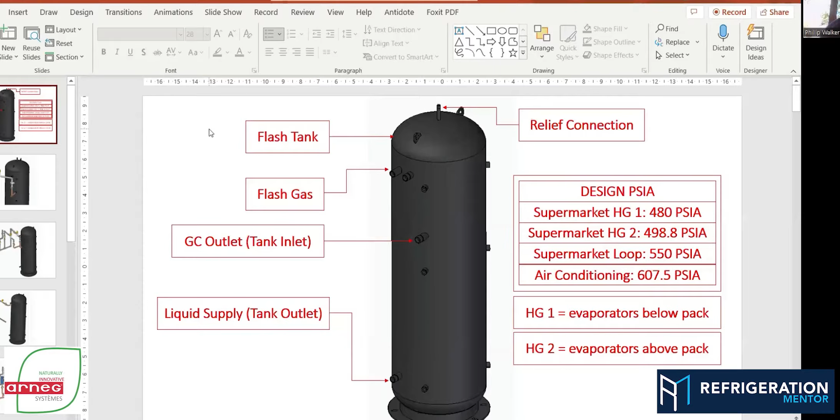And those who are listening on the podcast, we'll do our best to explain the visual cues. Okay, can you see this? Yep. Perfect. So I'll try and explain much better than last time. I know some of you folks reached out and said, hey, can you explain some of the photos, because I'm listening remotely.

So we're looking at a flash tank, and the flash tanks come in various shapes and sizes. What really determines the flash tank capacity is how much flash gas you have, or liquid being used for the cooling medium, more or less in the system, moving throughout your entire refrigeration system. So this specific one we're going to use for our hot gas discussion today.

So at the very top, we have 2 inlet connections. That's for our flash gas. And then in the middle, we got this inlet connection. That's our liquid coming back from the gas cooler. And at the very bottom, we have 1 liquid supply outlet that feeds our liquid header. And on the very top of the tank, obviously, we have our relief connection, which is typically between 650 to 750 pounds, depending on what type of application we're working on.

And all on the side, we have various design PSIAs. This just gives an outline on where Arneg systems is in terms of flash tank pressure in different types of supermarket and air conditioning applications. What we're going to look at today is basically supermarket HG1, meaning hot gas 1, 480 psi, and supermarket hot gas 2, 498 psi. And I know some of you folks reached out and said, what is the big difference between the two? It's really the location of the mechanical room.

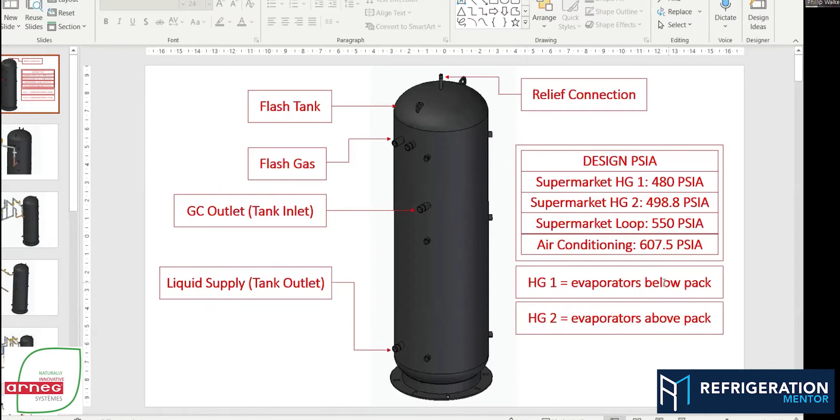When we're in a basement and the machine is lower than the evaporator, our flash tank will operate at a higher pressure. And when we're in a mezzanine above the evaporators, we'll operate at a lower pressure. That's the only difference. And as we mentioned here, HG1 evaporators below pack or HG2 evaporators above pack. Okay.

So to continue from the discussion we had last week, here's the inlet we were talking about into the flash tank. This is a high pressure expansion device. What we're looking at right now is the middle of a flash tank, and we have a high pressure expansion device. This one happens to be the Sporlan GC series of valves. This over here would be the inlet from the gas cooler, where that transcritical fluid is coming back and it's going to get flashed through this high pressure expansion device. Hence why we have flash gas.

Flash gas is naturally occurring throughout any type of metering device. So your synthetic refrigerant TXVs, your evaporators are going to have some of that gas traveling on top of the liquid. Or in terms of a CO2 system, it's just we have all mass going through this valve. So we have a larger quantity of this flash gas occurring.

The reason for the inlet in the middle is because we want that liquid to come in, drain or drip down to the bottom. It's going to, under the pressure, condense, liquefy, and then drip down into the bottom of the tank. And that flash gas, being that vapor, is going to naturally rise and naturally rest here at the top of the tank.

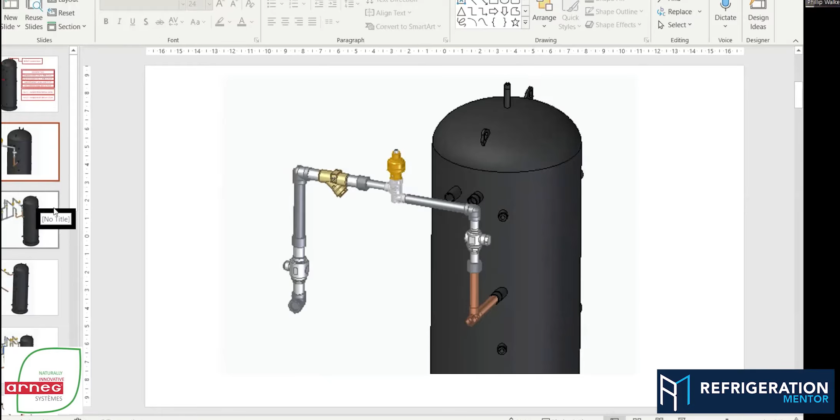And this is really, really important for hot gas, because what we're going to get into is how that hot gas is coming back to the tank. It's going to interact with the flash gas that's naturally occurring here in the top of the tank. So I'll keep motoring along.

So here is a typical setup with subcooling. We have our flash tank that we're looking at right now. We have our high pressure expansion device. We have a secondary high pressure expansion device. This is very typical to our designs. This is one of the most critical parts in an entire system. So we always add a second one.

The reason for that, in the event of any failure, it is a mechanical valve, basically, or an electronically controlled valve. It can fail. The advantage of having a secondary valve is you literally unplug this one, you plug the cord into the second one here, and the control system takes right on over while you're waiting for a replacement.

We've started doing this over the last 18 months and have had huge success. We've avoided some unnecessary occurrences that could have warranted a disastrous situation in the field upon failure of the valve.

So over here, it's just a subcooling coil we spoke about. How are we subcooling? Gas cooler outlets coming through the subcooling coil. We're leaving that subcooled liquid, or somewhat more desuperheated liquid in a transcritical state, flashing through that valve. Once again, liquid being formed inside the flash tank, and liquid is pooling in the bottom of the flash tank, liquid's leaving here, and then we have our flash gas on the very top.

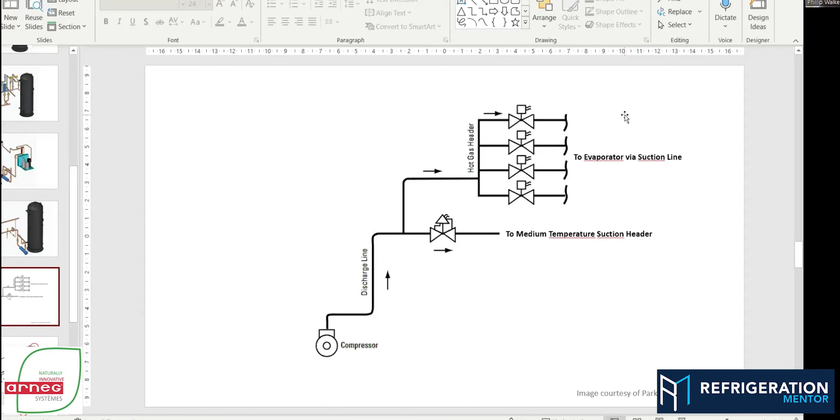In the synthetic world, we're running with minimum 7/8 on a suction side in supermarket, right up to a 1 1/8. Yeah. So the quantity is completely different than CO2. So does that mean it has to be piped differently? Because this is what I heard: well, we have both 5/8 coming to the case and leaving the case, and now we've got hot gas, and we ran into issues where we had to run longer defrost times to get it from that side.

Yeah, we've heard that. We've had these types of questions, and we've heard about these in the industry. Absolutely not. And what we're going to talk about is a few of those tricks with your evaporator and how it's set up to ensure that you get that mass through the evaporator adequately. And in terms of CO2, we've got to be conscientious as well. We can't overdo it. So I'll give a few rules of thumb that we work with.

Like if you're doing a bunch of doors, so you're working in a supermarket and you have a bunch of doors, I wouldn't exceed 20 doors for a defrost. A 20 door lineup is probably the maximum you want to do on your hot gas defrost circuit. Islands, adding 3 wide islands, at least for us, we wouldn't recommend. We will go 2 islands, to adequately get that heat out of there and into the evaporator for proper defrosting from inside the evaporator.

And we have the availability of working with Arneg as well. Arneg Canada is basically our sister company, and we do significant testing with them. So understanding the type of case, the type of coil that's being used as well is extremely resourceful. So our applications we're looking at, it's copper piping, aluminum, maximum 20 doors on that defrost lineup, 2 islands.

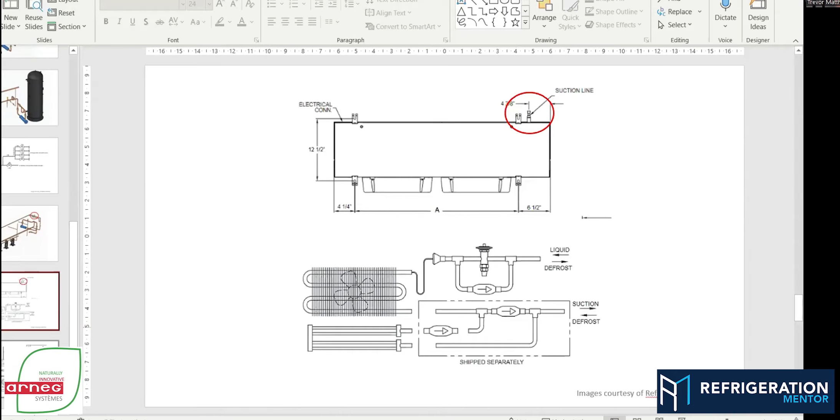Yeah, and you'll see that in any rack manual. Any manufacturer is going to say that because that's important with hot gas, and I've seen it in so many different books. And thanks for pointing that out.

Yeah, absolutely. So here's a blow-up picture of one of our evaporators, and I think this is great. We got to remember too, there's no distributor for this type of design. With CO2, we removed the distributors. We got limited pressure drop going directly into that evaporator. So as we're coming back out, here's a liquid line. This one was drawn with a liquid line solenoid. Here's my TXV. Here's my check valve. And you see, there's my bypass for my hot gas.

Now, if my liquid line solenoid and my TXV in this application are closed, I'm just going to pass hot gas through there. Okay. The interesting thing about this strategy is if I have my liquid line solenoid or my dump solenoid on my circuit, if I have a lineup and say I got 3 or 4 cases, if I obtain my temperature in one of those cases, I just close my solenoid down right here, right?

And then I can reroute my hot gas to those other circuits. So best practices: using your manifold style in behind the cases always makes a lot of sense on long case runs, so you can accumulate some of that hot gas and distribute it in an equal proportion. I totally understand it is not always accessible to do that. Every case offers its own different challenges and piping challenges, but anything that in the field we can do to help distribute that hot gas between all the cases on the circuit in an adequate fashion makes a lot of sense.

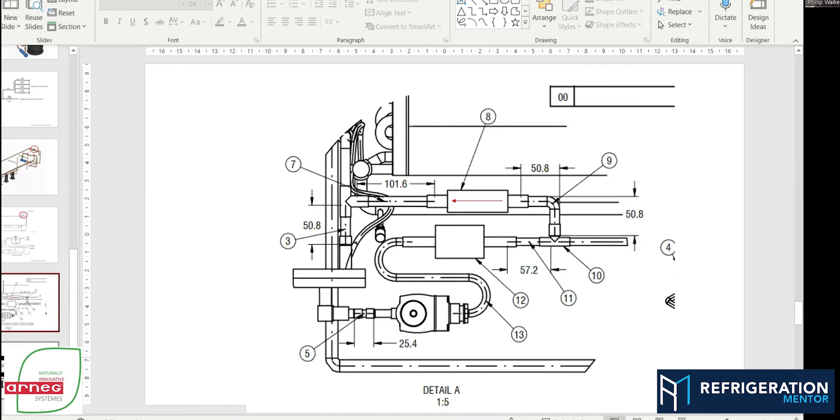So mass, pipe sizing, and return. I would say return is the most crucial part, because right now we're just throwing gas out there. And gas at a minus 25 coil wants to migrate down into the case. It's one of the coldest points in the circuit. We got this gas at 150 degrees, 800 to 1,400 pounds per hour. It's going to migrate down. But I got to pull that back in an efficient manner that complements the design. And this is something different Arneg does, and this is one of our patents.

So the hot gas, here's a slide. We kind of piece this all together. Here's our scrolls on the very bottom we spoke about. Here's that discharge header, right? At 150, 160 degrees. Here's my hot gas manifold. This is my supply manifold. All the circuits are leaving from this manifold going down to the case. There's my pressure differential with a relief solenoid. Now here's my return header. And you're going to note this return header goes right back into the flash tank.

This is crucial. The flash tank, remember, in transcritical, or even through the whole life of that machine, that tank is basically our condenser. And the pressure differential we're creating is between flash tank and evaporator. The gas coming back from my low temperature side is very, very close to a liquid. I want it to condense inside my flash tank, become a liquid. And that's a condensation that just occurred without ever touching the transcritical cycle. So it's an efficiency gain.

I'm using a resource existing in the system, not only to help defrost the coil, but we're also producing liquid at the very end of that cycle. So that's a question I have. So when it's coming back, it really should be liquid? Because it can come back, I guess, as a saturated gas, like a little bit of vapor and a liquid. But if it's coming back as a gas, what could be the issue?

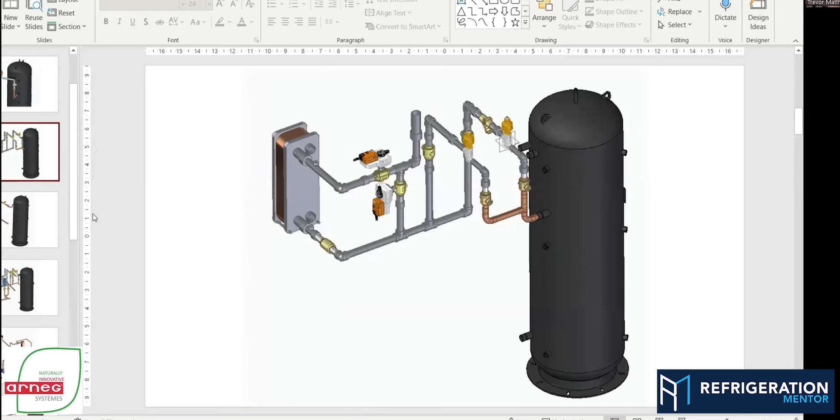So when we get back to the defrost here, we get the flow, we get the return coming back, we size it properly. We talked last time about flash tank stability. What is happening now? Now I've got all this saturated gas coming back. What is going on with my flash gas bypass valve at this point when I get all this going on? Because there has to be a good control system in place when all this happens, because there's a lot of moving parts. Absolutely. We've got discharge gas going through the CDS or suction stop, through the EEV and the solenoid or the check valve, and then back into the flash tank with your differential valve as well.

So now we got a bunch of moving parts. So what's going on with the flash tank at this point? Yeah, so if this gas is coming back and condensing inside here, naturally by density, that liquid's going to start to drop. That gas is going to start to accumulate on the top of the tank. This valve is going to start to open, okay? And we're going to start bringing that down now into our medium temperature header.

On a high mass system, what we do to help with that efficiency, it's almost like we do with the booster or the condensing unit application. We'll put, prior to the valve, a flash gas subcooler. So if we're producing a lot of flash gas naturally in the system because of the high pressure expansion device.

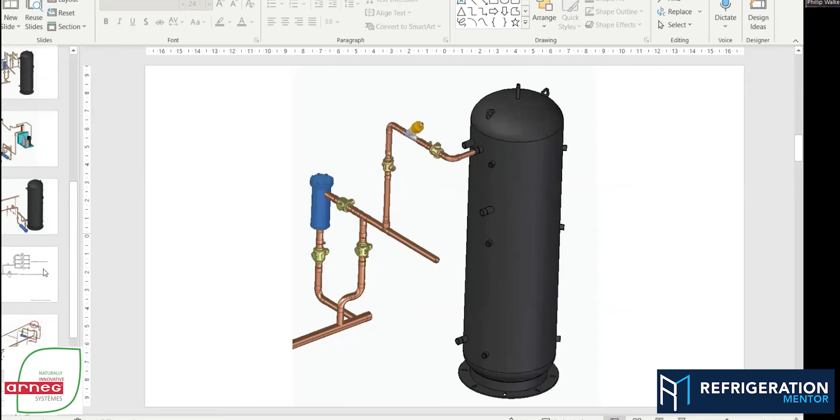Here, let me just dig up the picture. This valve right here. And then we got hot gas coming back. A large percentage of it is condensing, becoming liquid, improving the efficiency of the system. But we're also producing that additional gas inside the tank. So this valve is going to start to open.

Now, to limit the amount of gas that we're going to send down to our medium temp suction header, we add a flash gas subcooling coil where we subcool that flash gas into a liquid, and we drop that right into the liquid header. And it helps balance some of that inefficiency that could be created. Okay, so that makes sense.

So now what is the difference? How is that valve working when it's 110 degrees outside or in the middle of the winter when it's minus 35? Does anything change? Go ahead. Sorry, Trevor. Yeah, because I know if we're talking about the medium temperature side or transcritical side, there's a lot less heat in the middle of the winter than in the summer. Mm-hmm. But we're talking about the low side, the booster side hot gas defrost. What is the difference between the middle of the summer defrosting and the middle of the winter defrosting?

So the interesting thing on the booster side is it's not as variant to the ambient temperature as the transcritical side. So as the machine moves into subcritical, the booster is still discharging into the medium temperature suction header. So our compression ratio year round is fairly constant. So you're always going to get between that 150 to 160 degrees Fahrenheit.

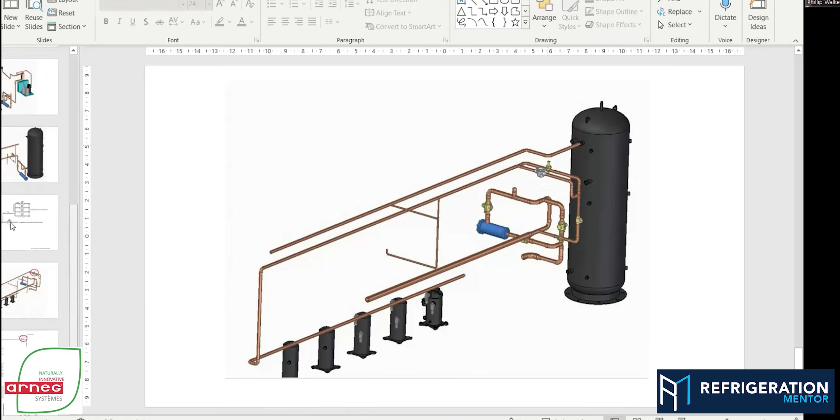Okay, back to the valve, there's significant changes. And we spoke about that last time, if you recall, the changes between the summer and the winter season, especially in Canada. This instability of the flash tank can be easily created throughout the winter months. It's more than just saying what's occurring with our flash gas or our gas cooler outlet. Very cold gas cooler outlet or very low pressure in the CO2 system will create instability.

Something that we have to take a look at is not only the subcooling coil here to help stabilize this, we actually heat the gas cooler outlet as well. If we start falling below 60 degrees Fahrenheit, we'll apply some heat to the gas cooler outlet to bring it up, because we're getting into an environment that just can create instability.

These valves, as we were talking about in this drawing, there's one valve, but most applications that we install in Canada or in very cool climates, such as Quebec or Ontario, where Trevor, you and I are from, we'll put a valve for the summer season and a valve for the winter season. To your point, the valve in the winter season is significantly smaller. It is there to handle mass flow throughout the winter months.

So the whole goal of all what we're speaking about is the flash tank doesn't lose its stability. We never go into an unstable mode throughout the change of the seasons that we see, such as in Canada, where we have to live through 4 seasons. And that the quality of gas and quality of mass being delivered to the evaporator by the points we just spoke about doesn't change. We still want to deliver that mass, whether it be 800 pounds per hour going down into the circuit at 150 to 160 degrees Fahrenheit.

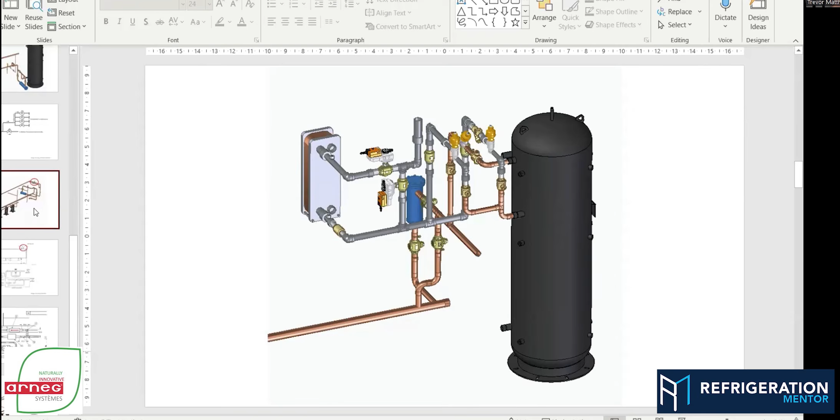And there's a lot of people listening, and more people will listen to this. It may sound complicated right now, but if you take your time and go through each system, if you're working on an Arneg system, start from the compressors, follow the piping, have the P&ID diagram with you, and walk through each section. If you're doing the defrost section, just take the defrost section and walk through to find each valve. What's this valve do? This is the differential valve. Here's the solenoid valve, and do it step by step. You don't have to learn this overnight. You just need to take your time.

Yeah, learn it over time. Well, the interesting thing is, as you can see here, this looks pretty typical to what we've all worked on over the last 20 years. The only thing is now, at least in our design, that hot gas manifold is just stretched out to the end of the rack, right? But I still got my pressure differential. We've always done it on the discharge line after the oil separator.

Well, and then we would bring our hot gas back and dump it into the manifold, or directly into the manifold prior to the condenser, or directly up to the condenser. Well, instead of doing that, my flash tank, I'm considering it now as that condenser. Yeah. So here's my pressure differential. I'm dumping it into that suction manifold because that's what's controlling my compression ratio.

So theoretically, my setup hasn't changed. The way we're doing the piping in order to make it work, because it's a booster system, has changed, right? Yeah. And the circuit layout is identical. Like, you still got hot gas solenoids, there's still the check valves, you still have CDS or suction stops closing down, we're going into a hot gas setup. So all that to the eye hasn't changed whatsoever.

I'd say the biggest change is just saying, wow, that flash tank, I'm returning to it. It's really crucial for me to understand where that pressure is on the flash tank, because as I change that pressure in the flash tank, it changes my pressure differential on my valve. And I'm injecting into my manifold. So as I change my suction pressure, it's going to impact my hot gas.